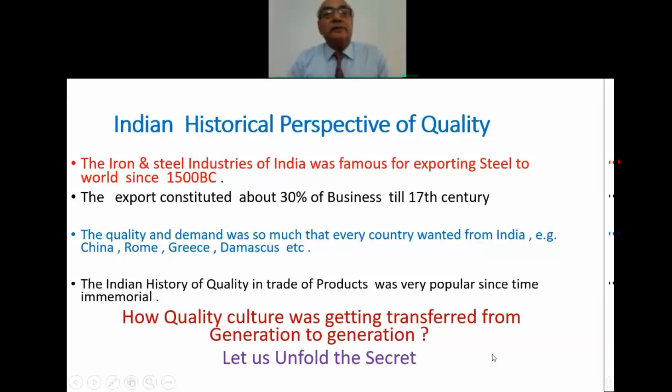What do you call it — art of skill, or quality? Now foreigners have taught us the word quality; earlier it was known as the art of skill. These are incredible ancient metallurgical wonders that defy explanation and pose a real mystery even today.

The other example is called Aranmula Kannadi. Kannadi is a Tamil word for mirror. There is a village in Kerala called Aranmula where they produce this mirror with about 30% tin content, polished in such a way that one can see its image. They say it is such an auspicious mirror that you see only the real image, whereas in our plain glass we see only the virtual image.

This mirror is said to bring prosperity and happiness, so in Kerala some families give the Aranmula Kannadi to newly wedded couples as an auspicious gift. What is that size, what is that quality — we are not able to replicate it, and they are not sharing the technique either, because they say if they share it, they lose their business.

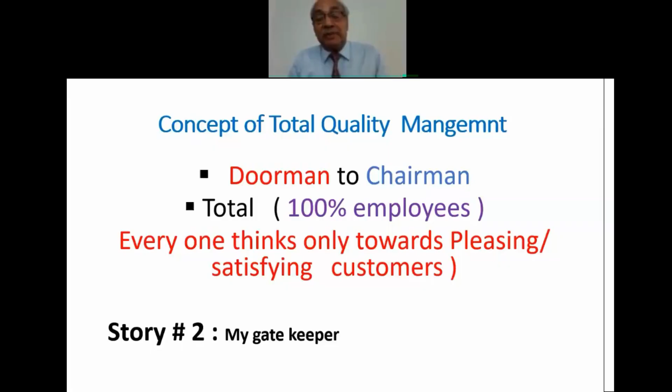Can you think that this happens in India? And we were ISO 9001 certified. I'm surprised, when this is the way we are working, about the boundaries.

Then they brought quality assurance, which is slightly different, and you always get some rejection - you will never get 100% quality. Then they brought quality control system, inspection department. Earlier we had that. Then quality guarantee for a group of products, and quality warranty for a particular individual. So much confusion - is this even known to my worker who is producing the quality?

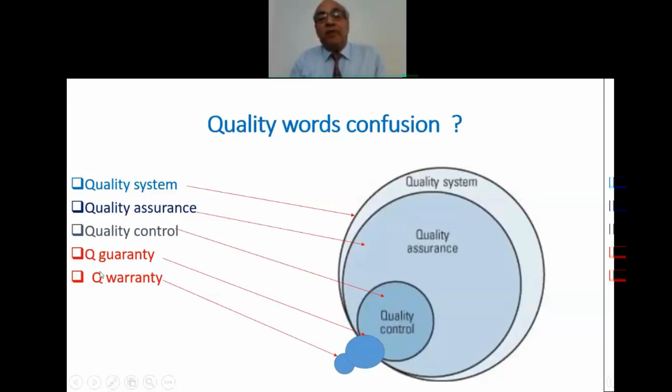I call it the old tools of quality control. The Japanese brought so much statistical data - control chart, run chart, Pareto chart, flow chart, Ishikawa diagram, fishbone diagram. I will not go into this because these old tools still exist and many foundries are following them.

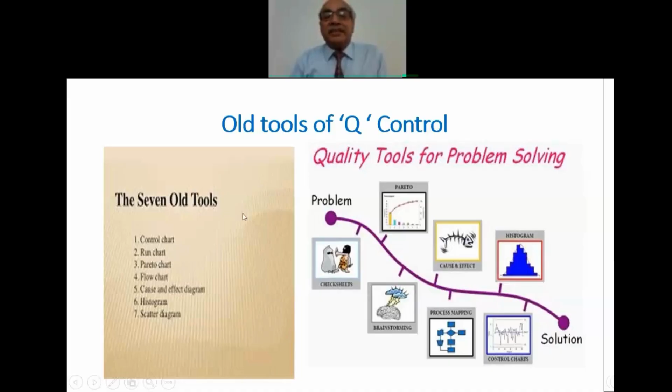But yes, this gives you some idea, but to what extent do we need to accept it?

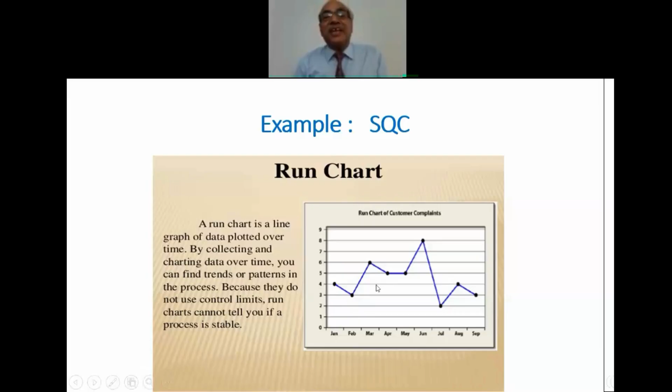Say for example, this is a run chart, and we call it statistical quality control. This is one of the techniques by which you get a rate. This is the trend after the event has taken place, after the castings have been made, we get this kind of trend. And some surge comes, then we start concluding about that process. By the time you control it, the other process comes like that. So this run chart has got no meaning. I'll tell you why.

Because the statistical quality control methods of product inspection and process monitoring. We get it only after the inspection. The statistical data is collected, analyzed, and interpreted to solve quality problems. It's a cure method. So the whole process was newly invented, like statistical process control (SPC). That includes the prevention of defects by applying statistical methods to control. So SPC is a prevention method, SQC is a cure method.

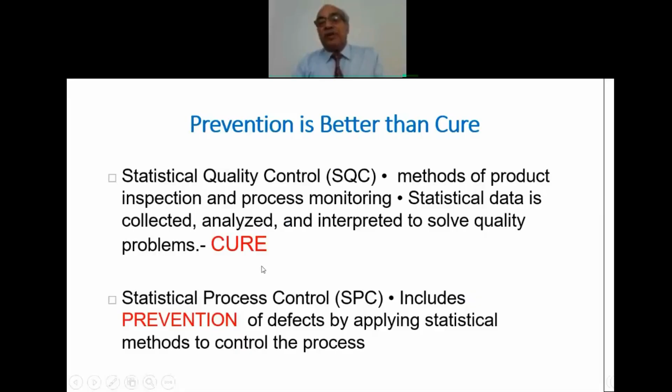So we should prevent it first. That was the whole principle. We brought it in many of the statistical quality control techniques. But how is it effective? Statistical process control in a nutshell is, if you look at the variation, especially in this printed chart. I'm sorry for that. So every process varies.

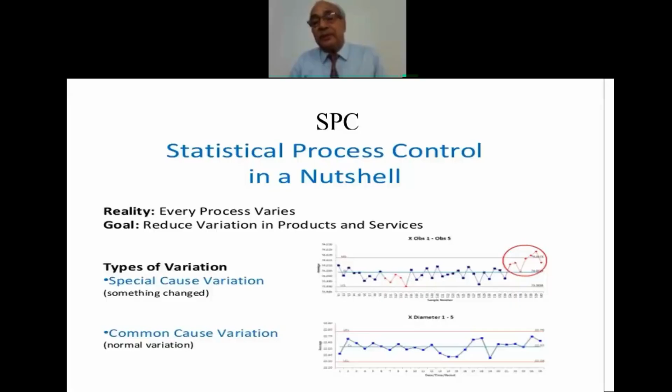Suppose my steel composition is from 0.22 to 0.30. So I will try to keep it in the middle, at 0.25. But the range is from 0.22 to 0.3. There is a big range. Now this range of carbon creates a lot of change in the properties. So we have to operate within a band as narrow as possible. If that can be done, that's the best.

So among factors causing variations in the quality in the foundry, I'll say human consciousness.

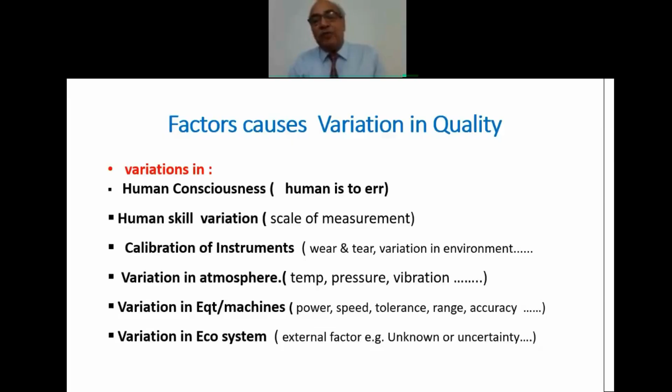So how to get excellence in process? Input is important. In a process there is input, there is a process, and there is output. There are only three factors in any process. Input is the raw materials, humans, machines, power, everything that goes in. Garbage in, garbage out, like a computer. So if your input is controlled properly and the process you are doing is also defined properly, then your output definitely will be better.

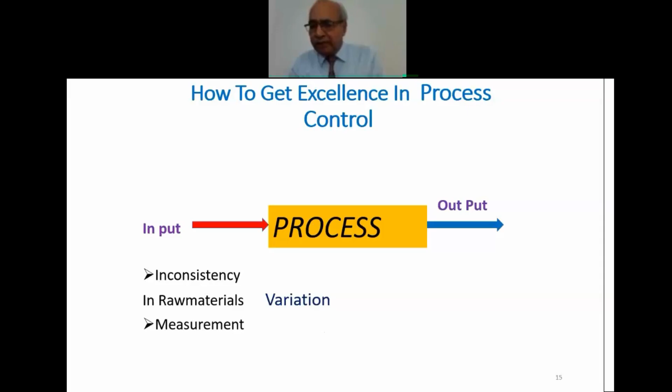Now what is happening nowadays? There are a lot of inconsistencies in the foundries. From batch to batch, the raw materials which we get, the measurements which we take from one weighing machine to another weighing machine. We try to take care of these things, but in the real sense, it's not happening. That's one of the reasons.

We also brought the Six Sigma concept into the country, and many foundries and companies feel proud of stating that they are Six Sigma. Let me introduce Six Sigma. It was brought by Bill Smith while working at Motorola. And it remained secret for almost 10 years because they were not explaining it to outsiders for fear of losing business. Later on, after making business, they revealed it: this is such a beautiful technique, we should release it to the world.

Now the Six Sigma concept followed the Taguchi method, Juran methods, Pareto methods used by the Japanese, and if we copy it the same way, it doesn't fit human nature, because they have grown up differently. Their lifestyle is different. In Japan, people say that if you make a mistake, they repent so much.

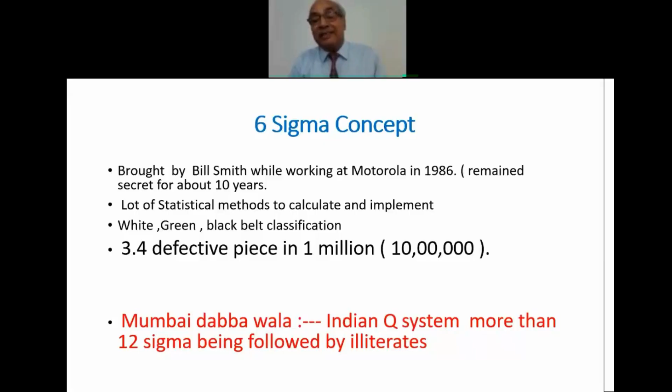So building excellence in process is not by accident. Excellence never comes by accident or by chance. Performing continually, consistently.

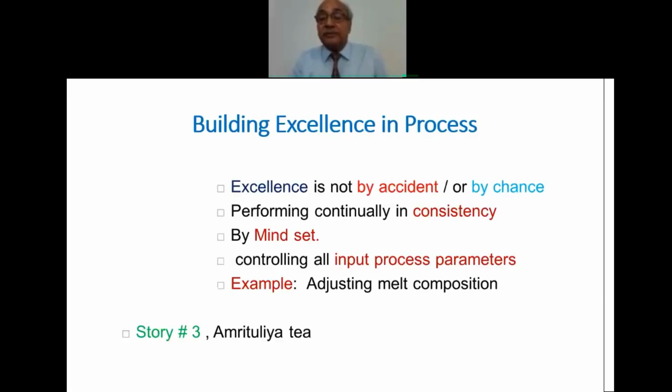I saw one of the objectives and problems of the NCTs. I will talk now about the NCT. This is the National Center for Technology. There, one of the objectives is difficulty in customers understanding. It's a very dynamic word, because customers' behavior changes.

One story, another story. I hope people are not getting bored, because this is another story by which we can make our product. And Chinese are following.

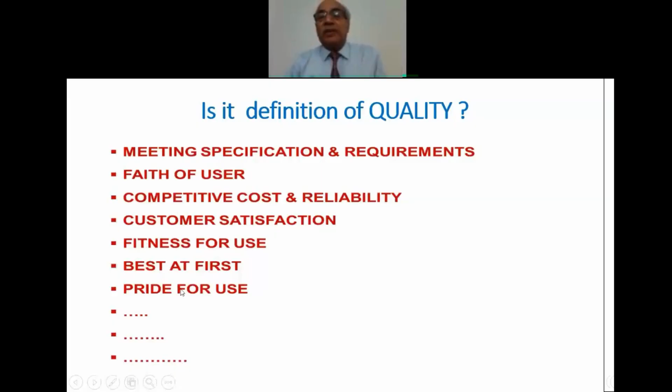Many times I also ask, what is the definition of quality? I generally question. Meeting specification requirement, faith of user, competitive cost, reliability, customer satisfaction, fitness for use, best at first. So many definitions are there, which I'll not go into. But a very important thing I will tell you: there are 750 crore people in the world. The world's population is 750 crore. And the same number of definitions.

Why? Because every individual mind is different. Like that lady and the milkman. So this is a different one. What you think, your worker may not think the same. What you think, your subordinate may not think the same. There will always be a gap of understanding.

It differs like nature and signature, so quality definition is different. That lady was asking for 3 cups of water, another fellow might ask for maybe 2 cups. So whatever the way, there's always a variation in understanding and requirement.

Quality is like a thumbprint, it never changes. The iris of a person never changes, even for twins, and brain cells also do not change. Every individual is different, so every quality perception is different. Everybody is different, so we have to standardize this. How to standardize? That's a question mark. So understanding of quality is my definition. Quality is indefinable, but understood.

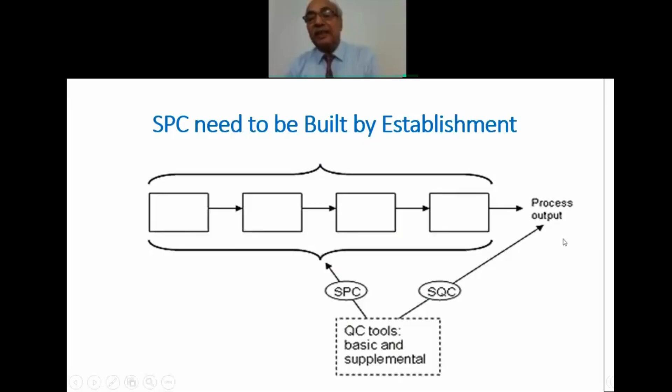Now I'll talk about the data we use for SPC. To build an SPC you need to have it. I have made it as data analytics - not just data, there's a difference. Analytics means effective and productive. Is your data effective and productive?

It's a comprehensive overview of the quality process. We check it by our process, by quality, within whatever boundary we are following. We already use some statistical process control to get early information about the process deviations. Yes, we do validation information too. But how reliable is the data?

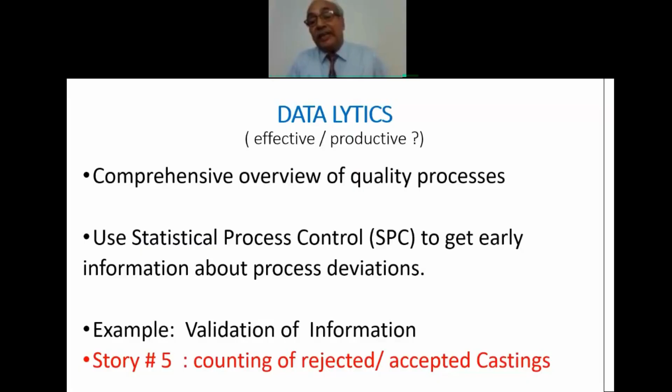These are some secrets I'm telling you today from my experience. So critical data validation in the foundry is very important - melt side, weighing of raw material is very important. Composition of raw material - sometimes we add ferrosilicon and ferromanganese and believe that fellow has got 70% silicon content or 70% manganese. 70 to 75% is generally the silicon content in ferromanganese and ferrosilicon, etc.

But it must be changing batch to batch. Probably we believe in the certificate of chemical composition he gives us and follow it, and ultimately it results in our final composition. We blame the melter, we blame the melting person. There are so many variations on the site, and I can question hundreds of questions and hundreds of processes. Can you think - when time is lost, by the time molds are ready and melting is not taking place, the mold gets cooled and many defects occur.

Time measurement, melting, cooling, etc. There are so many tolerances. Similarly, from the mold side, tolerances of pattern versus actual mold size varies.

I'll tell you one interesting example. I had to make a plate of about 8 millimeters cast for a certain purpose. So I said 8, no minus. You can keep it up to 1 millimeter, 8 to 9 millimeters. And the rate was fixed on the plate basis, number of plates.

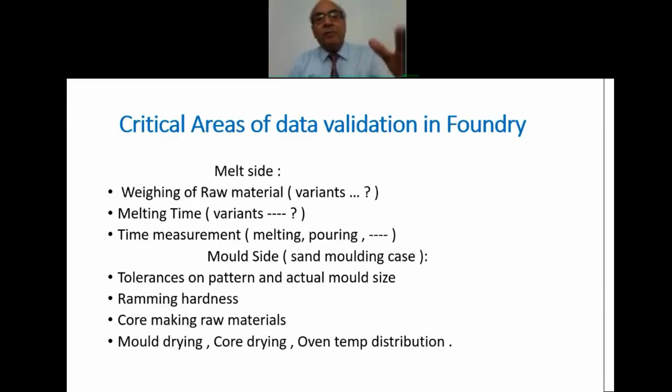I can tell you, there are plenty of examples following quality QMS certification. This was one of the charms in the 1990s, because this came first time in India - ISO 9001, International Standard of Organization.

ISO 9000. And there was Madras, then I was myself in management. The auditor will come and ask questions - what is your quality policy? What is your quality objective? And he said that he will ask even the workers.

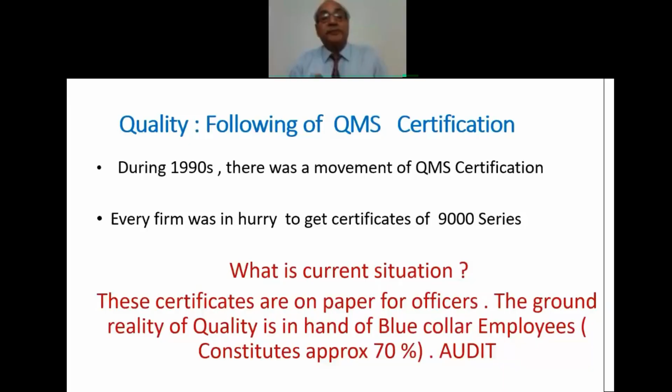Some give importance to quality, ISO 9000, particularly government organizations. I was very critical about this. On paper you show everything, and on ground reality, everything is different.

The importance of it - does it really help in improving quality, reducing costs? That we have to question. Yes, we talk about continuous improvement, but time gets consumed in documentation which is non-valuable.

Yes, you do it with due respect to the certifying agencies and those who have it. You have it for business purposes as required, but give more importance to your blue collar workers. Certification business agencies make money as a third party trust - why third party? People produce that quality themselves.

The Indian mindset about quality is like that. Indians have been imitating the quality concept - imitating quality. We have been copying all these techniques from the foreigners, and the day we started copying, we lost it.

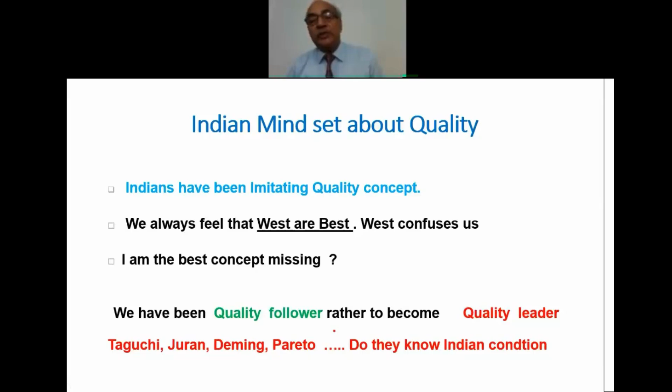Can I produce an Indian Juran? Can I produce an Indian Taguchi? Can we bring in that concept? That's my question to all.

This is a very interesting story which I would like to tell, about understanding quality understanding. This is another example story.

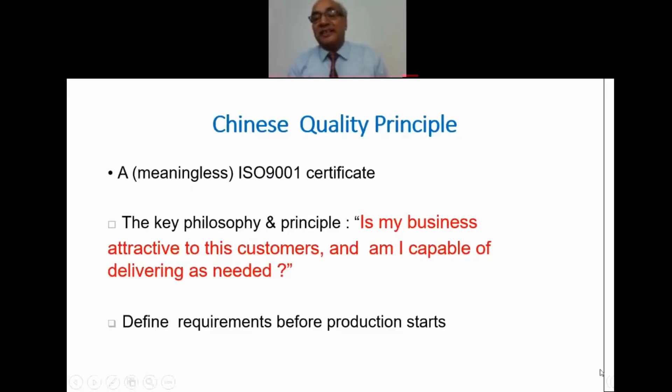Chinese are making that component, but the same thing which I saw in the US was the very thick version. Even if you pay 6 times more, why so? Because they know the Americans will not accept low quality - they are not looking only for cheap, they are also looking for reliability.

So that concept - they are selling 4 or 5 grades of quality for different countries, the Chinese. They are also working on economy of scale. They speak differently for different markets.

And how to minimize the waste - they are looking for this. It's very important, of course, a Japanese technique.

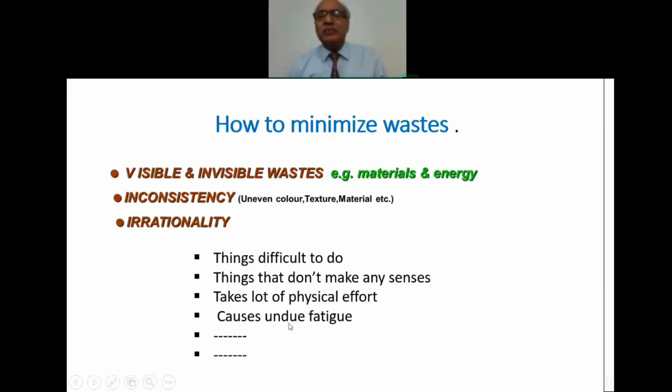So, I mean, this is how they are managing. And inconsistency, then irrationality with those things which are difficult to do - things that don't make any sense, take a lot of physical effort, cause undue fatigue. There are so many things which you should avoid, and we can definitely avoid it if we try.

So waste elimination - what I see is, anything which adds to the cost without adding value, we have to remove. Any process or any step which can be removed without affecting the product should be eliminated.

The forms of waste are mistakes and blunders - human error. Mistakes and blunders we call reject or scrap. Defective products, rework has to be done, leading to waste of time, waiting, transportation, stock, and rework. So input material and energy give output as product and waste. This is my equation - waste comes in various forms.

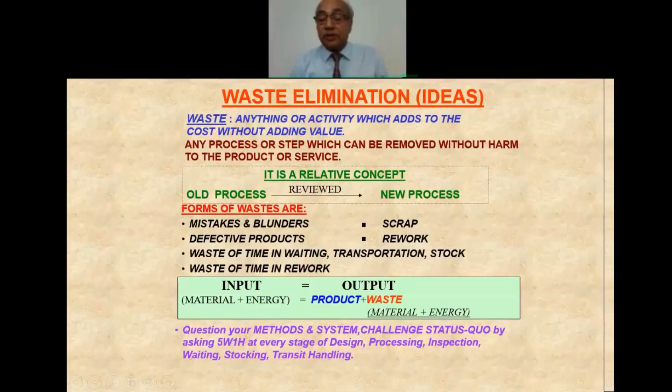You must question your method, the system, challenge the status quo. How can I challenge it? We call this the 5 Ws and 1 H - why, what, where, when, who, and how - which I'll explain later. We should question ourselves and find the answers at every stage: design, processing, inspection, waiting time, stocking, and transit handling. This is what we look for with the 5W1H, which I'll explain in the next slide.

Understanding the quality gap in quality handling - there is always a gap in understanding and communication instructions, particularly with Indian laborers. What you communicate to your boss versus what you communicate to your workers involves different mindsets.

So how do we understand the mind of our laborers? Let me tell you, this happened with me. I lost almost 7 lakh rupees over 6 to 7 months on a project. It was delayed, caused tremendous loss, and I was reprimanded. What happened?

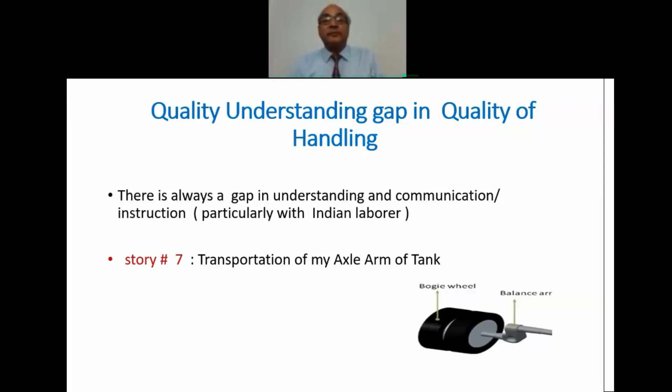So changing the thinking process is very important. What do we have to change? The nature of human beings is unchangeable - DNA cannot be changed, though nowadays some technology is coming to change DNA too. Nurturing is a continuous changing process - this is one of the facts happening.

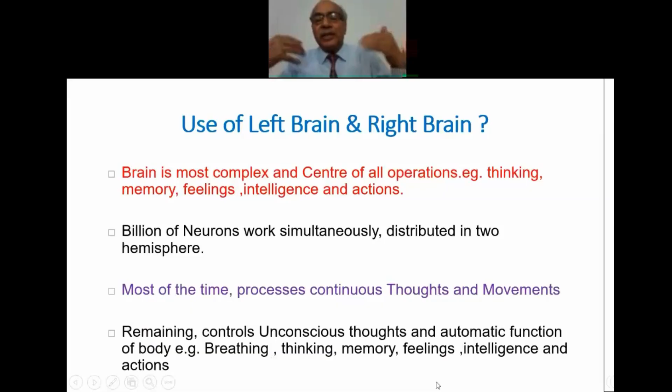Remaining control: unconscious thoughts and automatic functions of the body. For example, breathing, thinking, memory, all intelligence goes automatically. Can we make them conscious? How? We have got a left brain and right brain. Most Indians are left-brained. The left brain normally controls the right; when the right hand does more work, the left brain works.

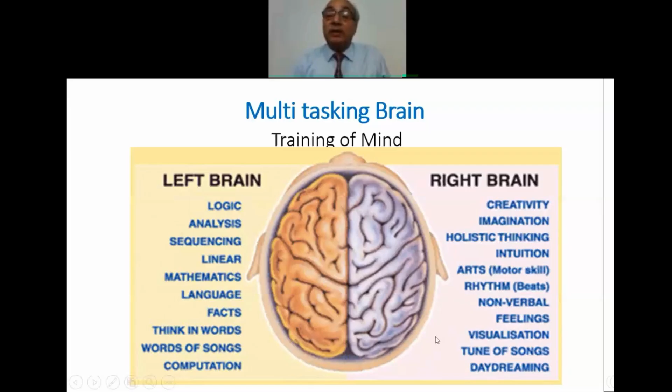But I tell you, the right brain has got one thing: intuition. Intuition means a sixth sense which comes, and that is the artist. So this intuition has got a bigger role in controlling our workers. And how do we develop this? Intuition is basically a quick penetrating sight, insight, or gaining direct knowledge about any habit.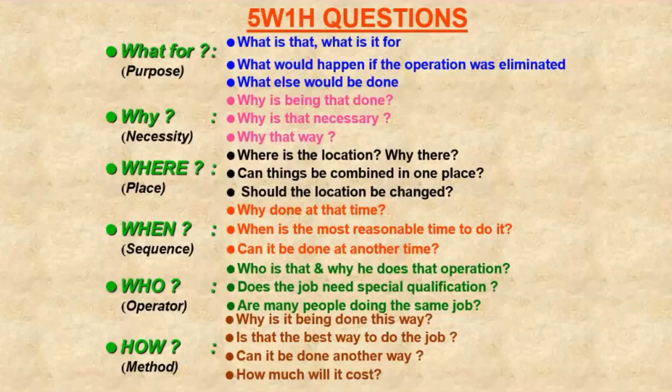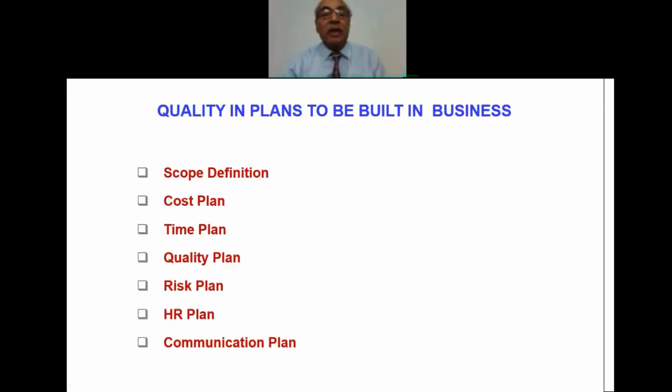So we need to build it in the business. And the most important is the risk plan. You make a cost plan, time plan, quality plan. The risk plan is very important. HR plan, communication plan. I give more emphasis on the risk plan. What are the ways by which my workers may slip from their skill? If I could find out and make a questionnaire, I will definitely succeed.

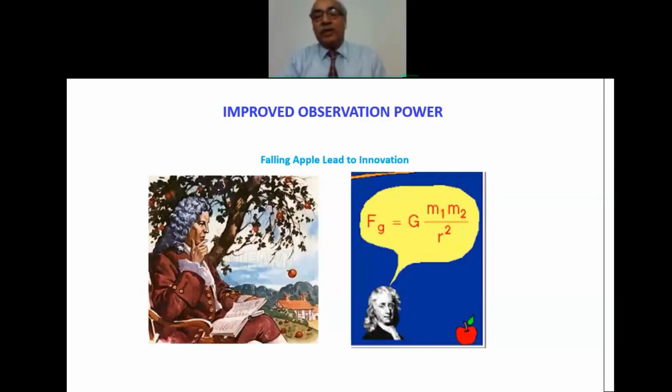So this is what we have to make a beginning with now. We start thinking why it is happening. Indian foundries are not able to export. We are not able to meet the cost. We are not able to compete on quality with others. The foreigners have put us in a challenge.

For example, I will tell you. We spend a lot of time searching for where the fourth Allen key is. In one of the shops, I saw this person always searching for the fourth. You could see it: 1, 2, 3. Three Allen keys are seen, but the fourth is not seen, and we waste a lot of time. Same thing with tool searching by individuals; we waste time. Can we use PEEP? PEEP means a place for everything, everything in its place. One simple technique, doesn't need anything.

In the house also, when the power goes off, we start searching for the emergency lamp, and we start asking where did you keep it. When we bring a fridge into the house, we start looking for which place we have to put it.

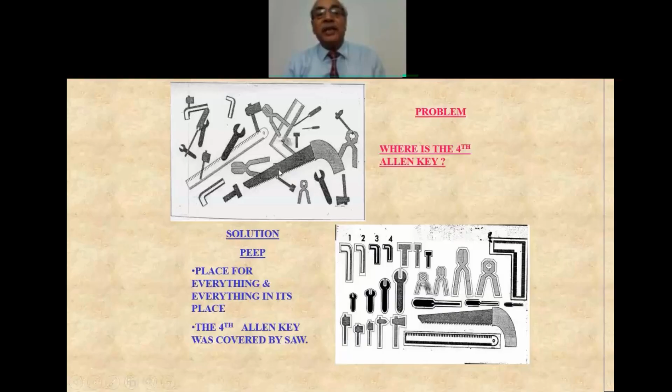There is unfortunately no plug there where we wish to keep it. So like this, intuition is very important. Where we keep it, there is a fourth plug. The fourth Allen key was just behind the saw. So this is one example I'm telling you.

But everybody says that I have no time. If you ask everyone, they will say no time. I have no time. And creating time is a big challenge. How we create time, nobody knows. Once I asked my granddaughter, she's 6 years old, I told her to write some tables up to 20. I said, when will you give? She always answers me, I'm very busy now. I said, why? I have to attend the class. So many reasons. Answering very nicely.

And no time. So if a child is busy, and parents are busy, the foreman, every CEO is busy, workers are busy, then why are we not able to get the output? It means we are restless also.